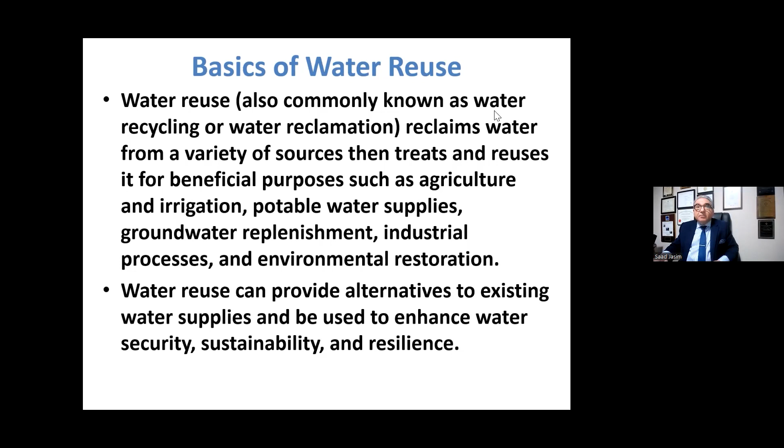Okay. There are, in general, two kinds of water reuse from a planning point of view: planned or unplanned. Unplanned means the source water is basically composed of previously used water. A common example of unplanned water reuse occurs when communities draw their water supplies from rivers which receive treated wastewater discharge from different communities. Many cities have water discharge and water intake not far away from each other, and that's where you see the challenges.

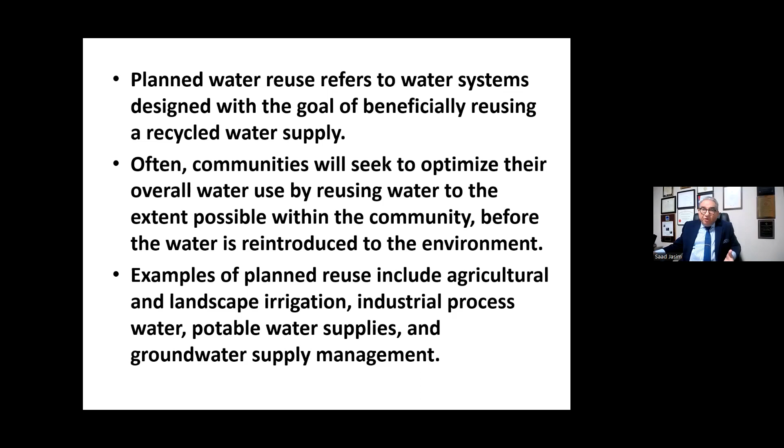Planned water reuse refers to water systems designed with the goal of beneficially reusing a recycled water supply. Communities want to optimize water reuse to provide more safety for the environment, and also use this water source for irrigation, which is the major use of water in most countries now, especially the MENA group, which is Middle East and North Africa. So that gives more options of new water sources.

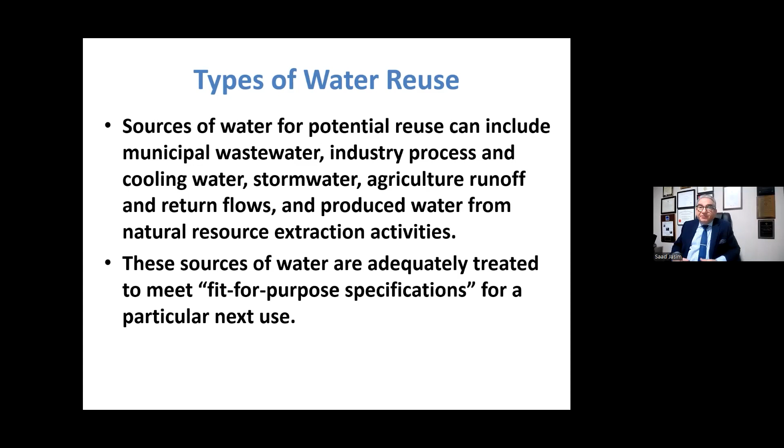So for types of water reuse, there are many sources of water that can be reused, such as industrial process water like cooling water, stormwater, agricultural runoff, and return flows. These are different sources that could be used. And these sources usually need to be treated to what we call fit-for-purpose specifications. That means each one of them is site specific.

So fit-for-purpose specification is: you develop treatment requirements to bring the water from its existing source level to the water quality needed for the new application. So when you want to do it for agriculture, it's different from when you do it for industrial.

So you have to develop it, and the main thing to keep in mind is the health of the people working. So if you put reused water that has some pathogens, that means the farm workers could be in jeopardy and could have human health problems.

So some of the examples of water reuse: irrigation for agriculture, irrigation for landscaping, such as parks, rights of ways, golf courses. And golf courses now are known to be one of the biggest consumers of fresh water, because they try to keep it green all the time, because you have those members who want to come and play golf regularly. So they almost water it every day, if not more, if it's warm weather.

Municipal water supply, process water for power plants, refineries, mills, and factories. And one of the issues is that sometimes the fresh source water could be a problem. I'll give you an example: the Monroe nuclear facility. Back in the late 80s, early 90s, it almost shut down because the intake got accumulated with zebra mussels. They blocked the water supply. So those are some of the problems you have.

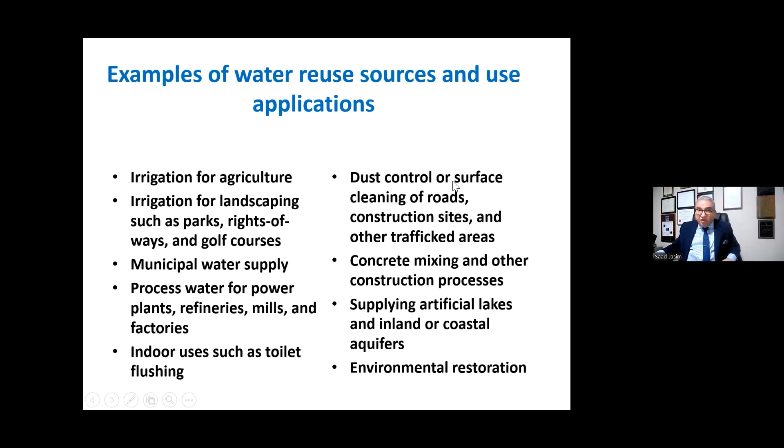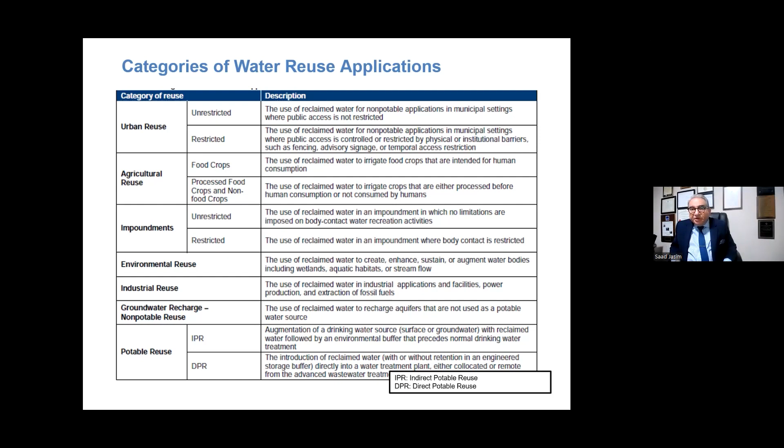Groundwater recharge is one of the key things they are looking at in locations like California and Arizona because of the water shortages. They used to depend on one of the major rivers in that area, the Colorado River, and that river has come down to a very low level in the last few years. So the recharge of groundwater is important because groundwater is usually used heavily by agriculture, because it's cheaper than paying for fresh water. So this is a good list of these kinds of things, whether it's indirect potable reuse or direct potable reuse.

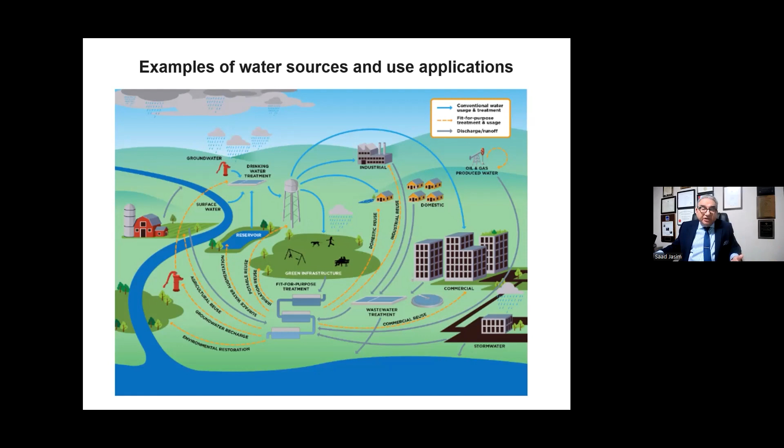Also, people find that even in agriculture, you get water that has chlorine residue in it, and this is not the best. In many other countries, like where I came from in Iraq, back in the 60s, we used to have at home a separate raw water line for the garden. So that reduced the impact of chlorine and also reduced the pressure on the water treatment plant, because otherwise you're going to be producing almost twice the amount in order to satisfy the demand.

So in Canada, for example, there are certain applications, not widely used, I have to say. Canada is only 37 million people, and we have in Canada more than 20% of the world's freshwater. The Great Lakes is 20% of the freshwater of the world, plus many other rivers and tributaries. So that's why there are some applications, for example, reuse for toilet and urinal flushing. Some applications for agriculture, not widely used, but it is.

I'm one of the people who've been pushing for that, because not many people, unfortunately, even academia, like universities, are interested in getting into projects like that. And everybody goes after... Science is becoming like politics. Whenever a new contaminant comes, everybody runs after that. Like now the PFAS. I remember 20 years ago it was the pharmaceuticals.

And one of the media reporters contacted me and he said, has the pharmaceutical issue been resolved? I said, no, far away from that. And he said, so why does nobody talk about it? I said, because they now have a new item to talk about. And the problem is most of the time the politicians talk about it and people follow that, especially if you want to get a grant, you need to have some political support to get that, unfortunately.

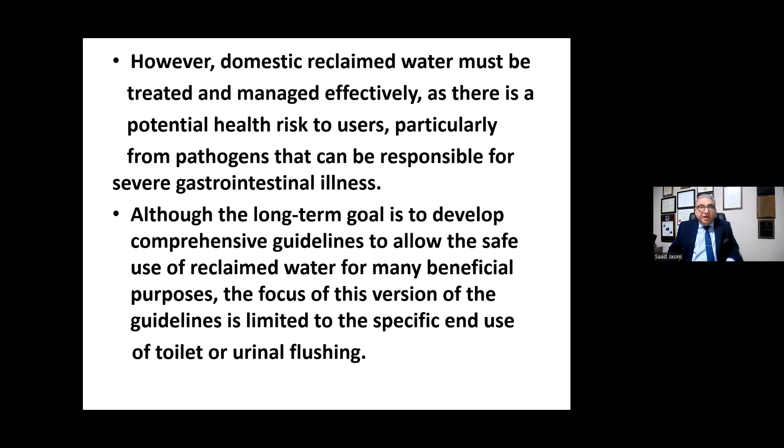So a big issue to consider when you have water reuse is the health risk, especially pathogens, because if they have pathogens that could come directly or indirectly to the person, they could cause a severe gastrointestinal illness. So when you develop a comprehensive guideline, you have to keep in mind that a major issue is the impact on human health, directly or indirectly. And that is why the guidelines need to be developed.

So basically, when you have these kinds of guidelines, you know that you are protecting the public health. Any guideline will include values for water quality parameters, selected to demonstrate how effective the treatment used is. So basically, they put a table for you, what treatment needs to be used, and what is the guideline, what is the minimum, what's the maximum. Pathogens, you should not have any, especially parasites or bacteria, even total coliform, because it will become a problem if you keep feeding it.

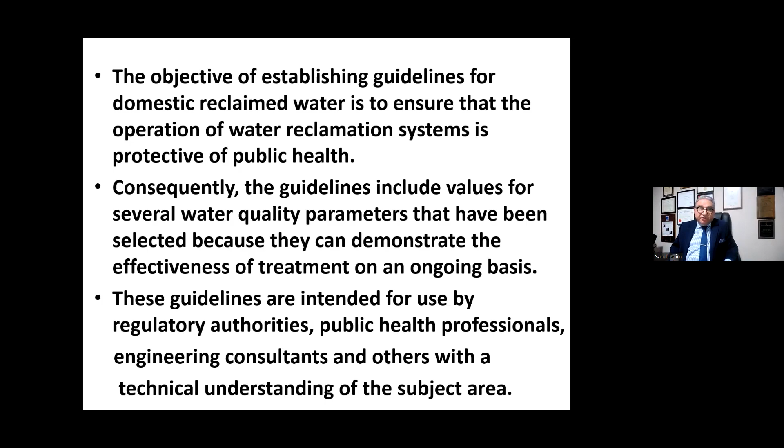And the people who are involved in that need to discuss it with engineering consultants and people who have knowledge in that area. And there are some situations, for example, when they use water to flush toilets and urinals, that could make a significant contribution to reducing water use.

And one example, when I went to Walkerton, after the tragedy when 7 people died and half of the town were sick in hospital, we developed the Walkerton Clean Water Centre, and we built a LEED Gold building, and we did water reuse, because as a training center you could have more than 100 people present, and you have big washrooms. So we use the water from the labs, and that gets disinfected again and used to flush the urinals and the toilets. That would help. That means you control that there is no bacteria or protozoa.

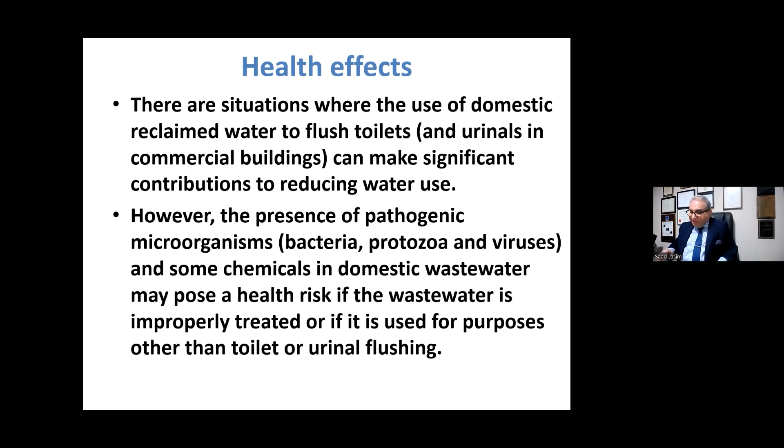If you're going to use domestic treated sewage effluent, that could have some of these kinds of challenges. That's why you need to have certain disinfection processes that you know are not going to compromise the removal of these compounds, because if by mistake it comes on your hand and you put your hand on your mouth or your face, if you have any E. coli or protozoa in that, it could cause a problem. And sometimes the cross connection, if there is any leak, could be a problem as well, and it could cause many people to be sick.

So this is of particular concern for individuals, especially infants or elderly people, because in infants their system is not highly developed, and also the body weight is small, so there could be a problem. And elderly people might have dialysis, and it could cause kidney damage. And in fact, in Walkerton, that strain of E. coli caused kidney damage, and the 7 people who died, died because of kidney failure.

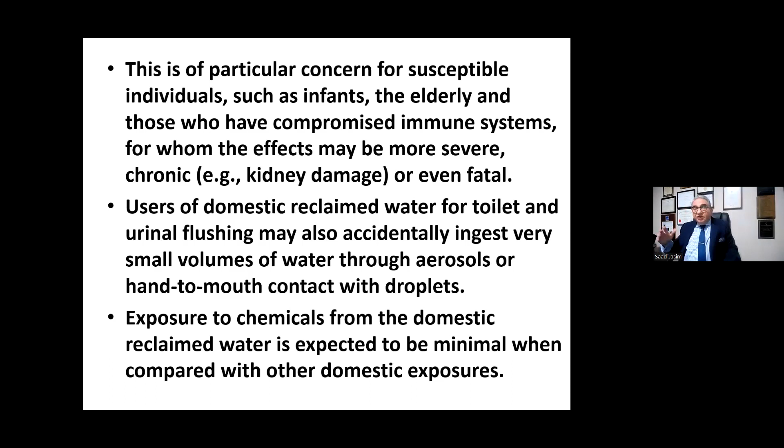So that is why you need to have a very stringent disinfection process in order to maintain the safety of the people. The exposure to chemicals I would consider maybe the second one, but that always has a long-term impact on people. So that's why you need to make sure that this does not have an issue like that.

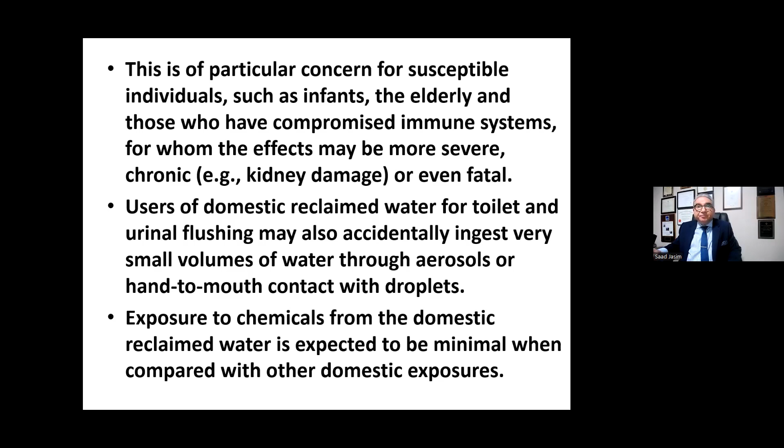So you need to do some kind of management when you do water reclamation or water reuse. That means when you do collection and treatment from a single domestic dwelling, for example, for clusters or apartment buildings. And there is always a potential impact on people, even with small systems. Sometimes a small system could have more complex problems similar to large systems.

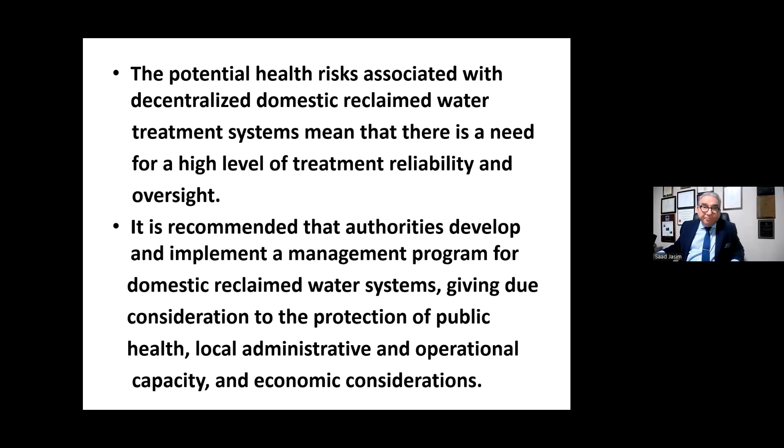So the potential of some kind of contamination with reclaimed water means that there's a need to have a high level of treatment reliability and oversight. And that's why when you design a water system, you don't design to what the guideline needs, because the guideline is the minimum. You always design with a safety factor, because you could have a major storm, you could have a problem, and that's why you have boil water advisories happening, because the system is not reliable or robust enough to deal with that.

So you need to develop a site-specific risk assessment. You have to have people with the knowledge to come and evaluate the potential microbial presence in the source, and what kind of reduction or inactivation is achieved by the current treatment. And with treatment technologies, you have to compare the treatment capability with the existing risks. So when you have cryptosporidium, which is one of the tough parasites because it has a shield, chlorine cannot impact these parasites, whatever the concentration is.

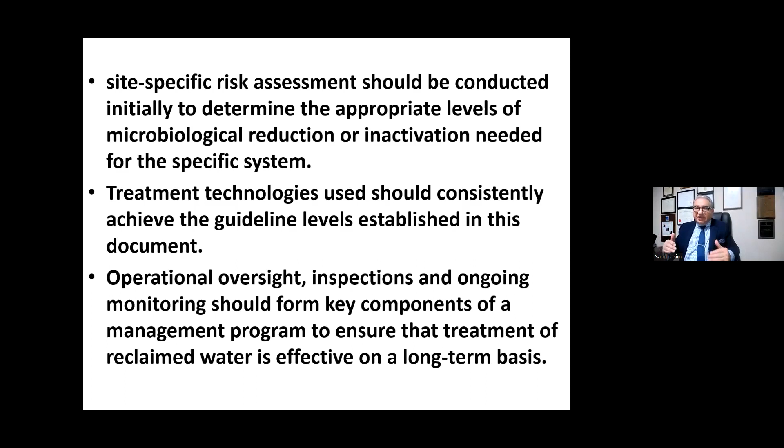And that's typically what happened in Milwaukee when 100 people died in 1993. So you need to develop systems that are capable of dealing with potential problems. You don't develop a system based on the good existing situation. That's why when I tell people when to sample, you sample when there's a heavy rain or a storm, because that's a worst case scenario, and you have your system designed to take care of that.

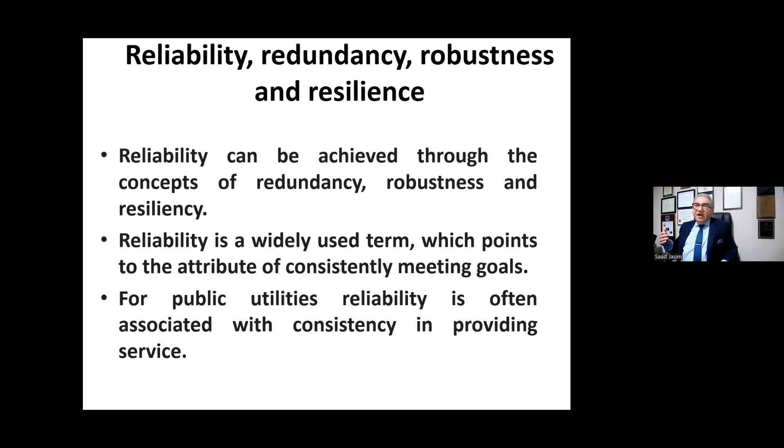So you need to have reliability and resilience. You hear this word quite a bit these days, but it depends on a few specific topics like redundancy, robustness, and resiliency. And I'll be talking about this now. Reliability, as I said, is used a lot by scientists, by politicians, by regulators. Reliability is often associated with providing a consistent quality and quantity of water for the water business.

So for a potable reuse system, reliability would describe the ability of the system to provide water to the public without compromising public health, and reduce the use of the drinking water supply. Redundancy, robustness, and resiliency describe the measures that could be taken to achieve reliability. So redundancy is the first one, and that is a typical thing when somebody designs a system. You need to have redundancy just in case.

For example, you have a standby pump. If you have one pump to deliver the chemicals, and that pump fails, your system is compromised, and you're not going to be able to do chemical treatment, flocculation, and all that, or even pump the chlorine into the system. So you need to have a backup pump. So by the time you repair that, the other pump is taking its role. And usually that has to be done automatically. When the signal shows this pump is not delivering anything, the other pump will kick in immediately, and that is how the system is designed.

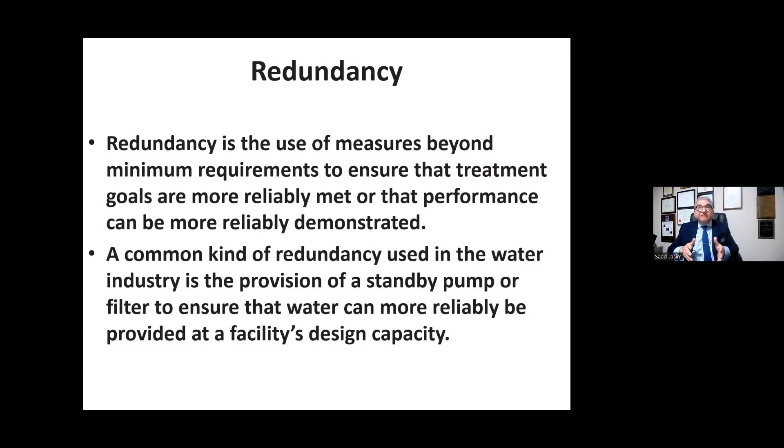But at the same time, you have to be economically right. You don't put 5 backup pumps, because that's a waste. You need to look at how many pumps you need if one pump fails, or 2. The other aspect of reliability is when additional treatment is needed. For example, there's what we call the multi-barrier system, another term used a lot, and we use that for treatment. That means if something fails, the other one will support.

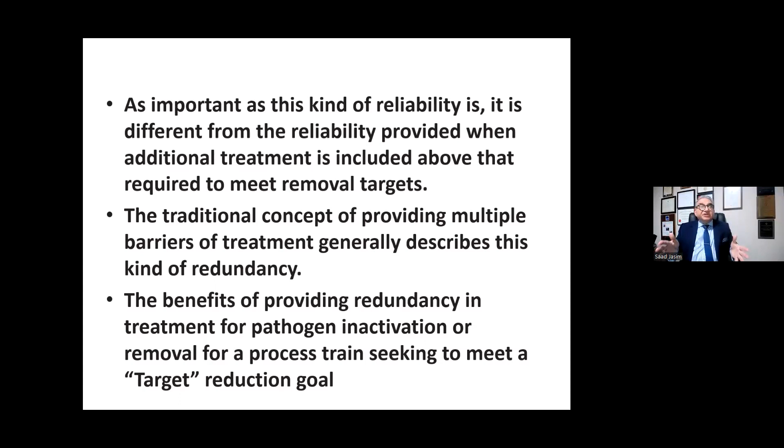For example, in the Walkerton situation, there was a failure of chlorine. There were more contaminants coming, plus the lack of knowledge of the people operating. Then the biggest failure was lying about it; that's why people went to jail. Even that's not enough, because 7 people died, and there is never any compensation for that. So that's why you need to have a multi-barrier system. Robustness means the ability of the system to address certain contaminants.

For example, during a heavy storm, and I'll give you an example, I served in a location where we were downstream about 2 kilometers from the sewage discharge of the city. So in a major storm, the amount of contaminants is overwhelming. So you have to have a system that has a control to push that and deal with that, or to kick in other things for redundancy.

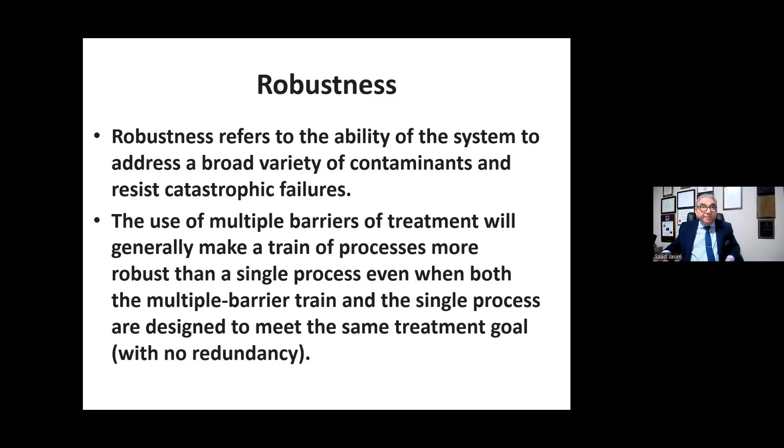For example, if you have one ozone generator and it's not capable, the other one kicks in to achieve the concentrations needed based on the model for the design. So the multi-barrier system here again exhibits great resistance to prevent failures, because you have more than one. It's like a building that stands on four pillars. If one pillar fails, the building might still be standing, but if 2 fail, most of the time it will go down, or 3, because no building will stand on 1 or 2 pillars only.

So that is general talk. I'm not going to get into the civil engineering, but that's just a rough example. So basically, when we say robustness, that robustness is the ability to deal successfully with conditions beyond the actual operation. The resilience is the reliability when the redundancy and robustness are not enough. For example, a combination of monitoring, control, and engineered storage buffer.

So if the operational criteria are not met, for example, we put filter-to-waste on the filters. We have a trigger based on the turbidity coming in. If it's beyond that, the filter goes to waste. It will not go with the general flow that's going to the reservoir. No, that filter will go to waste. So resilience is when you have the ability to deal with that without delivering water that has problems to the consumers.

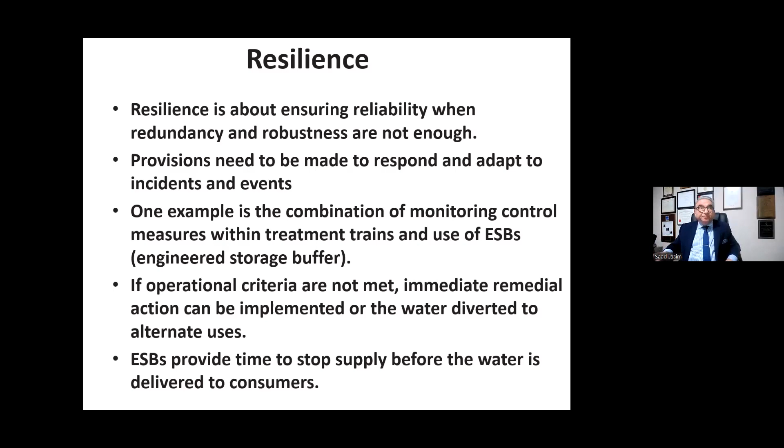So how to validate these things? You have to have some kind of control measures when we use the potable reuse scheme. For example, some communities, like Singapore as I mentioned, do a lot of operations between membrane and disinfection and all that, in order to produce safe drinking water without impacting public health, no different from other sources of drinking water. And the chemical contamination and relatively high concentration of microbiological activity could increase the focus on validating performance.

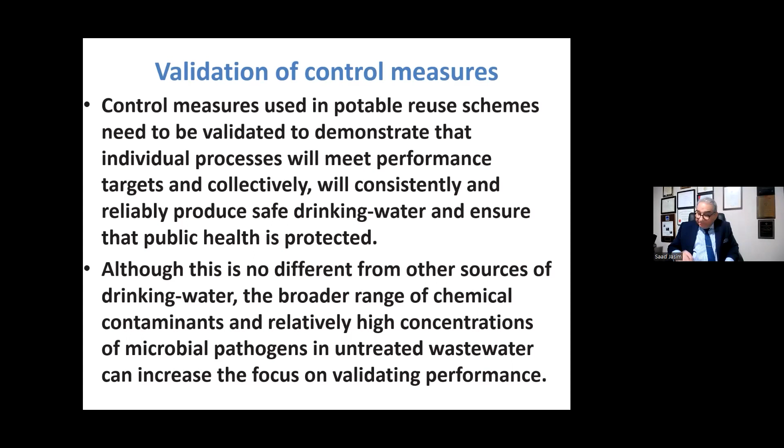So you need to look at how to achieve the performance, whatever the level of hazard reduction, if you have more contaminants compared to the normal resilience of the system. So you have to develop operational criteria beyond the usual controls used regularly. So basically like a backup plan, plan B or plan C, to make sure that you're able to do that for the applications to be supplied.

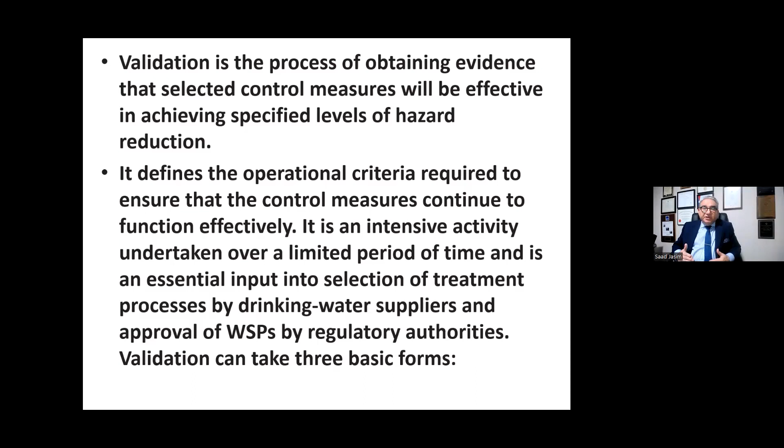So the evaluation of existing data and information is usually published data. Manufacturers provide data on how, when you operate your system, the system can deliver up to that kind of flow, for example, of chemicals. So you have to follow that, and the best way when you are designing is to have some kind of pilot testing. Pilot testing is the closest way to reach a good full-scale design. Bench scale is good, but a pilot system is always better.

And now I'll be talking specifically about the MENA region, the Middle East and North Africa. Historically, a lot of work has been done in these countries, and they developed innovative water solutions to deal with water scarcity. For example, in the Gulf area, the desalination process, and in other locations, building dams, and also drip irrigation. However, we need to look at the challenges and how to optimize water management for that region.

So water scarcity is a big issue, and that's been identified by the United Nations and the World Bank. There's a study released by the World Bank in January 2023 on current management strategies across MENA. There's a conservative estimate of water demand by 2050: an additional 25 billion cubic meters needed a year. That's a big volume.

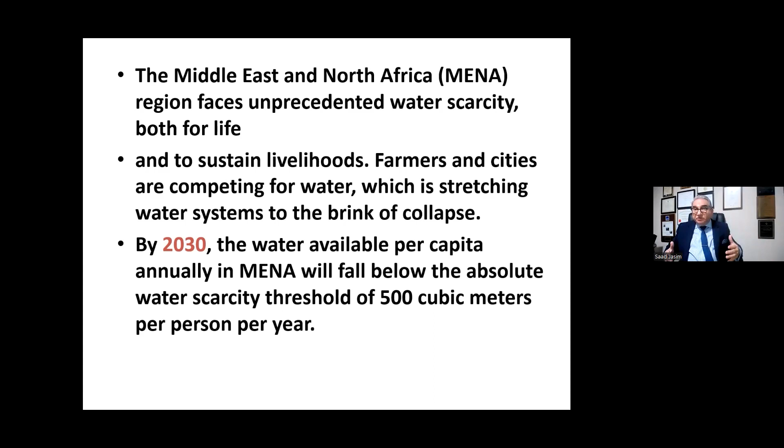Most of the time, in the last few decades, the MENA region focused on the conventional objectives of protecting public health and environment. But water scarcity and urbanization will have another impact because of climate change. That means you need to go beyond the conventional way of looking at that, because reclaimed or reused water is a key solution, because it's a source.

I am a person who used to be in charge of water systems for cities, and when you supply water, the amount for drinking doesn't go beyond 10%. The rest is used for everything else: washing, irrigation, everything else. So you need to look into this issue seriously.

So the MENA countries, which are 10% of the area of the world, receive only 2% of the world's average annual precipitation, and that's significantly low, and contain as little as 0.3% of the global annual renewable water resources. The average annual rainfall in the MENA region is about 250 millimeters. But many large areas are very dry, especially in the Gulf area and further down in the Sahara regions, with not more than 5 millimeters.

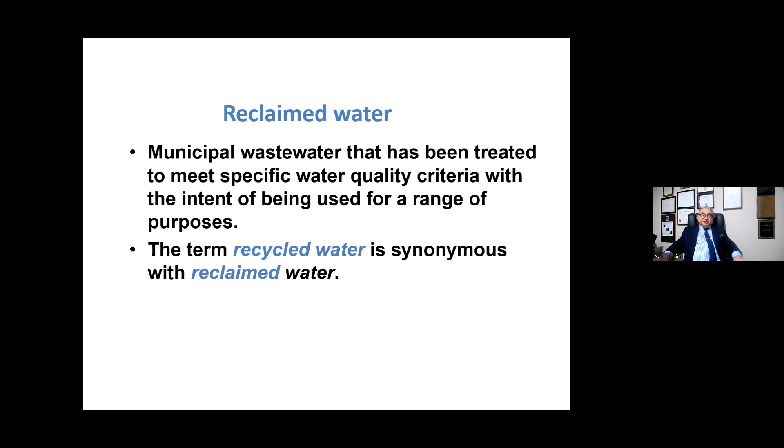So reclaimed water. Again, municipal wastewater that's being treated to meet specific water quality criteria with the intent of being used for a range of purposes. And the term recycled water is synonymous with reclaimed water.

And the problem is sometimes we have some weak baselines for water quality regulations. And again, regulations and guidelines give you the minimum. That's why always in your plan, when you operate, you have to set higher criteria. Because whenever any problem happens, you could go below the guideline level, that is a violation, and that could impact public health as well.

So climate change is now causing more of these issues. Food security is a big problem. And in the Middle East and North Africa, Algeria, Egypt, and Morocco are among the top 10 countries importing grains, although they are among the main grain producers. Net cost of food commodities imported by Arab states increased from $10 billion in 1980 to $28 billion after that. So the increase is significant here.

Climate change is something many people used to deny about 10 years ago, but people are realizing this is significant, and treated water reuse could be an answer. And the issue here is not just the science. We need to keep talking about the social aspects in the media, because it's public acceptance of water reuse. And in this region, we don't talk as much about potable reuse, but at least for other uses.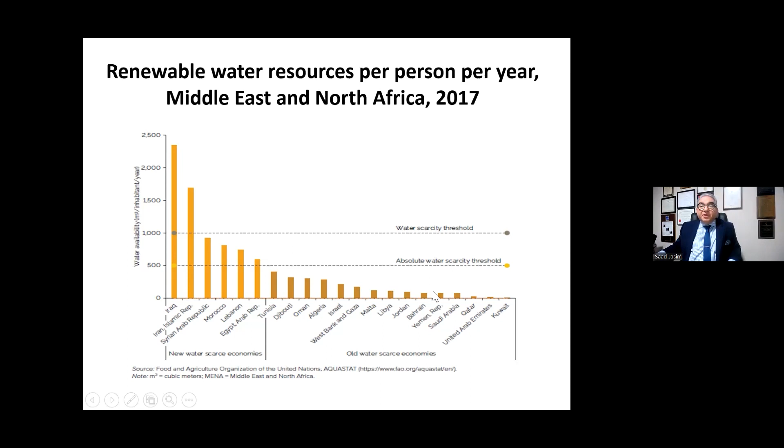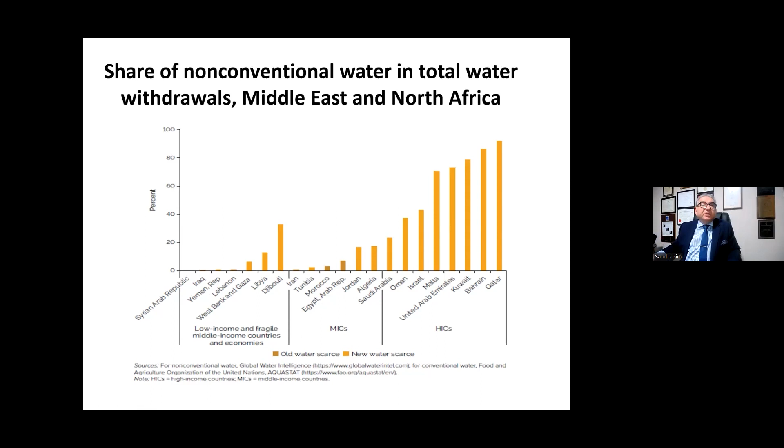And here the non-conventional water, and you see Qatar, and Qatar has a small population as well, but the impact they're doing is useful for some of these approaches. And these are the high income countries, and you see a better situation here than middle income countries, and here low income fragile economies. And that is the most updated report from the World Bank about the expectations. They have economists and people who collect data on-site to come up with these details.

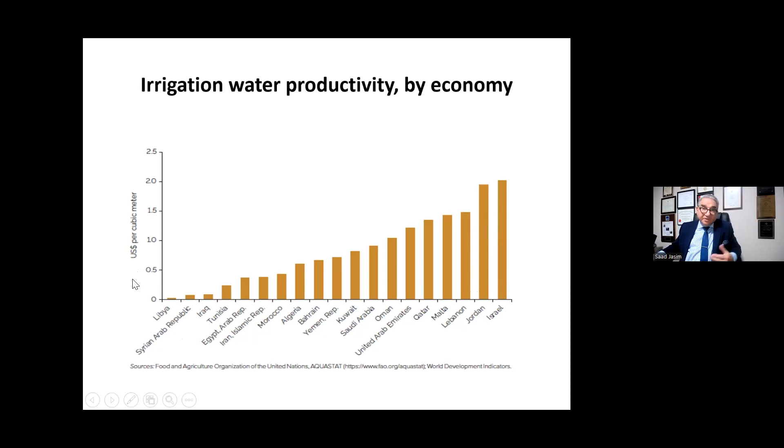The Food and Agriculture Organization of the United Nations developed a study as well about irrigation water productivity. Israel and Jordan are close to each other, and again Libya is one of the lowest in the area, followed by Syria and Iraq. That is because of the political issues, the wars, the fighting. So you lose a lot of the value of the system. Some of the systems are not working anymore because of that. So we talked quite a bit about this.

So mainly agriculture water use is the highest, and it is predicted that agricultural productivity in the region will drop by 25% by the year 2080 due to climate change and water scarcity. And that is alarming. That means you will have more dependence on other countries to supply you water, bottled water and others.

And Qatar, for example, has reported that production of treated effluent increased from 24 million cubic meters in 2004 to 117 million cubic meters in 2012. That's because of the construction, the work population, all that. And that could change, especially since the World Cup is finished and most of the construction is done. So there will be some reduction in use. But at the same time, there could be more projects, and it is expected that about 67% of the TSE goes to agriculture, mainly irrigation.

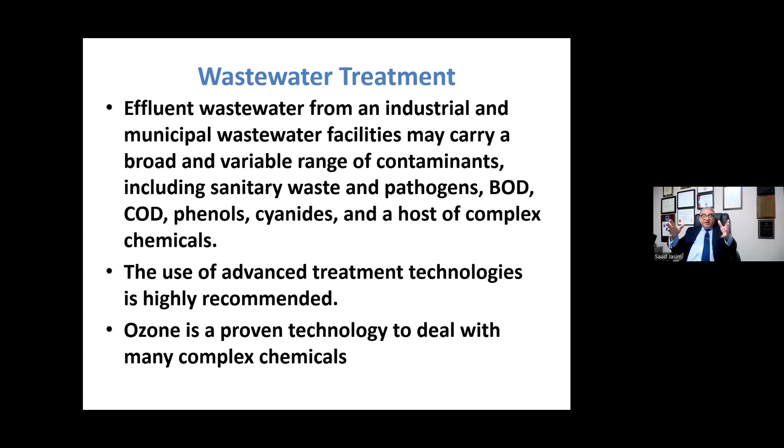Ozone is a proven technology for oxidizing and reacting with many complex chemicals. Ozone, if some people don't know, can be produced in the air. When you have lightning, an electron breaks the oxygen molecule, which has two atoms, into those atoms. So this will be broken into two. One of these atoms attaches itself to an oxygen molecule and becomes ozone, O3, three atoms of oxygen. But it is a reversible reaction.

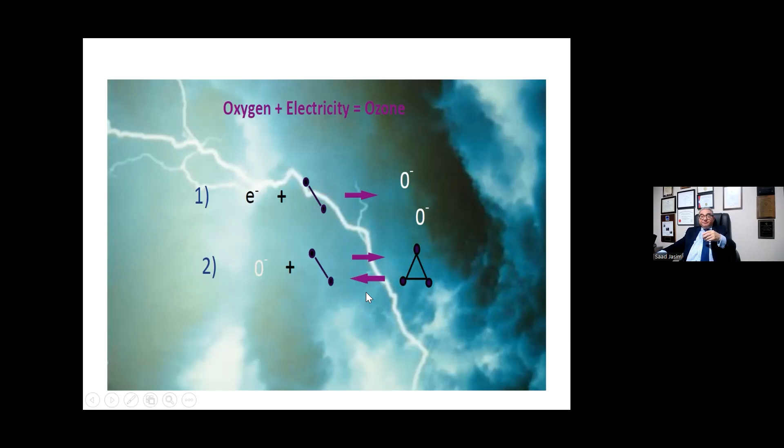That means ozone is not stable, and that's what makes it very reactive. If a gas or chemical is stable, it's not as reactive. But if it's unstable, that means it's very reactive. And this is what we just said, how it works when you have an electric discharge, like what happens with the electron. You break it into two atoms, one attaches itself, so it becomes O3.

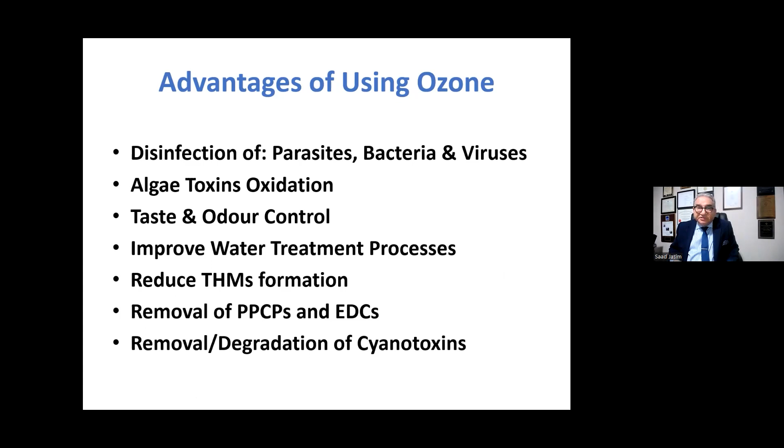Advantage of using ozone: disinfection for parasites, bacteria, and viruses; the algal toxins; oxidation; taste and odor control; improving water treatment processes; reducing trihalomethanes, which is a carcinogen from chlorine application; removal of PPCPs; and cyanotoxin degradation.

So the study was done by the Water Research Foundation in the United States at 10 degrees C and pH 7. They found you need 1.43 CT for ozone. Chlorine is 112. Chloramine, which is chlorine and ammonia, 1,850. What does that mean? For example, if you have 1 milligram per liter of ozone, that means you can inactivate this Giardia in 1.43 minutes. But if you have 1 milligram per liter of chlorine, you need 112 minutes. And if you have chloramine, 1,850 minutes.

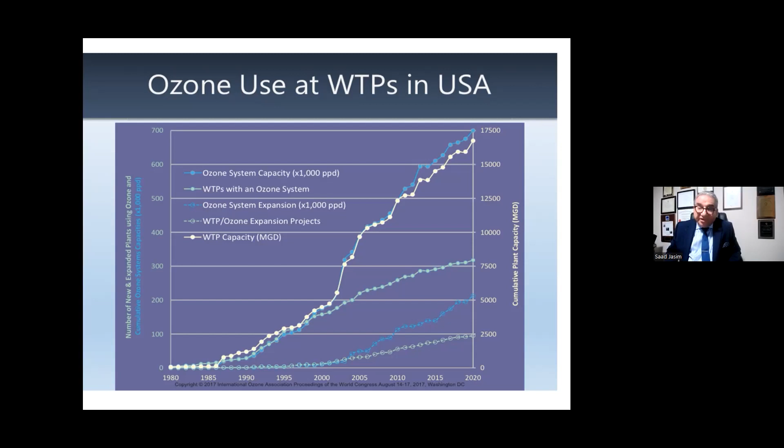And if you go now to Europe, most of Europe is using ozone. France, Britain, Germany, Switzerland, and many others. Switzerland is the most strict on the issue of contaminants, and they are using a lot of ozone and ozone-based advanced oxidation. Japan is also one of the leaders in the application of ozone for water and wastewater treatment.

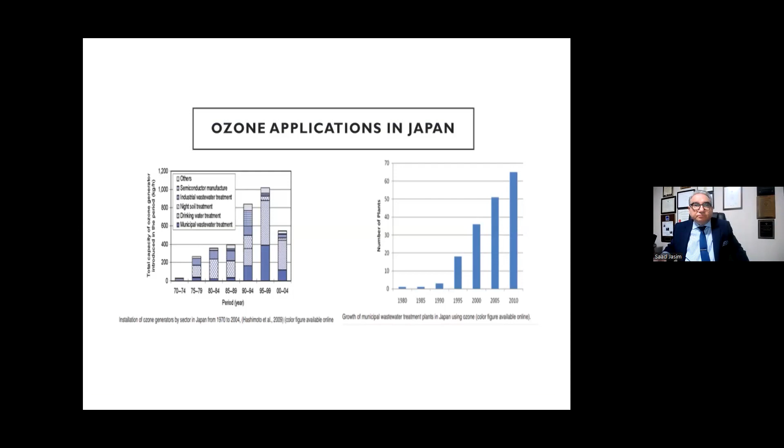So ozone is a powerful oxidant and reacts with the PPCPs, the pharmaceuticals and personal care products, and EDCs, the endocrine disruptors in water systems. These compounds could cause cancers. And also we've seen, as I presented in previous presentations, that they have an impact on some of the species in the water, like fish.

Some of the studies show that it impacts the fish, and the male fish start to produce female organs as well. And the shape of the head of the male fish looks like the female fish. And they call that the feminization of fish. So that's a very well-known topic in the industry; the work on that has been going for more than 10 years.

So you need to look at what kind of parameters you want to reduce, what kind of organics are in the water. We worked on a study in the city of Windsor, and we did an evaluation of some antibiotics, because the World Health Organization did a report collecting data from 114 countries, and they found that the biggest issue in the next few decades is the antibiotic resistant era. And we've seen outbreaks in hospitals and other locations. Somebody goes there with, for example, breathing problems, and leaves with a skin rash from MRSA or others.

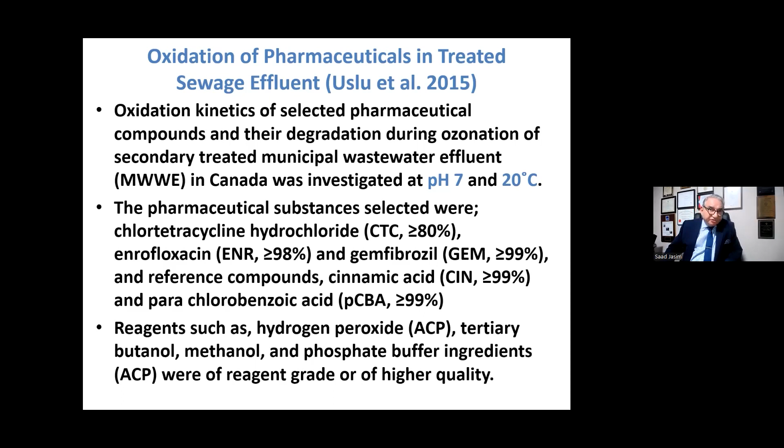And in the study, they looked into certain reference compounds. And we don't have to worry about that, because this is pure chemistry for the HPLC work in order to get these reagents and all that. So basically, when we looked at these compounds, we found that some of these reagents could provide higher grade quality.

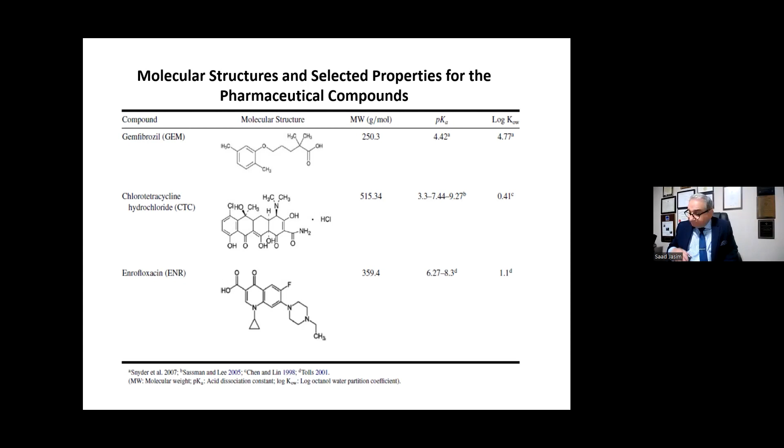So you see, that's why when you're going to design a plant and you want oxidation for that, you have to keep in mind you deal with the worst case scenario, which is the gemfibrozil here, in order to get the reaction. And this is because of the chemical structure of this compound. So the degradation of the pharmaceutical substances was higher for the CTC than the ENR, and the gemfibrozil was the lowest.

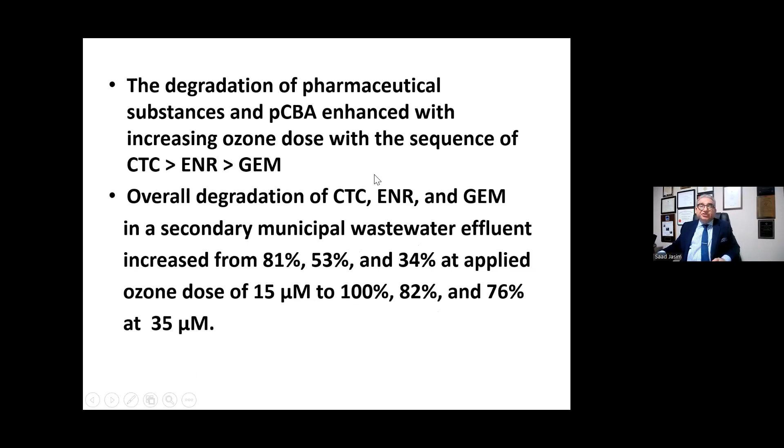So overall degradation increased from 81 to 100% when we increased the ozone dose. So ozone dose was key. It increased here for the CTC from 81% to 100% when we increased it to 35 micromolar. And the other ones from 53 to 82 and 34 to 76. So a major reduction.

So ozone oxidation: other studies were done by Shane Snyder, who's now at the Nanyang Technological University in Singapore. At that time he was in Nevada, working with the municipality. He looked at ozone and ozone-based advanced oxidation, which is ozone plus hydrogen peroxide. Ozone is a little bit selective in the reaction, but when you add hydrogen peroxide, the hydroxyl radicals make oxidation more unselective. So it goes after all of it.

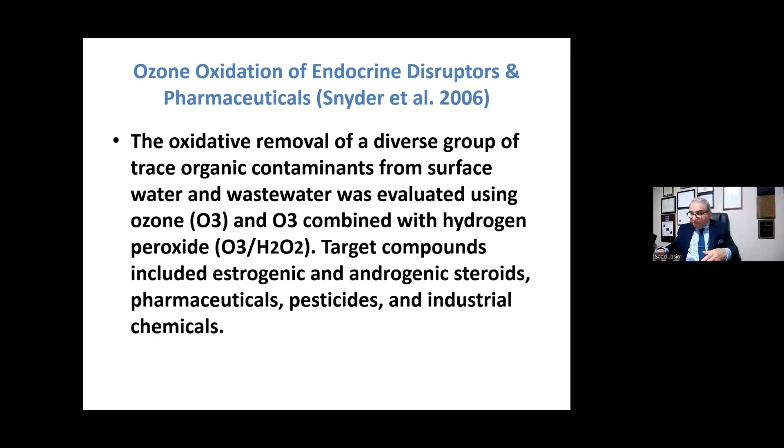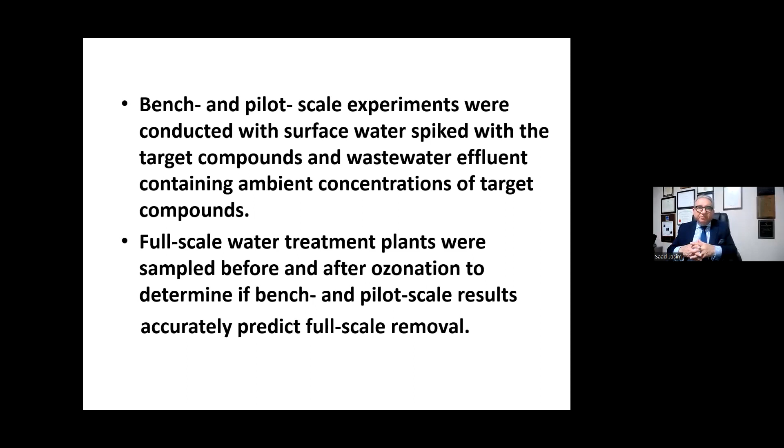So we did a project in Qatar during the time I was working there, in 2015-16. We wanted to investigate how useful the treated sewage effluent water would be. As we said, the population is increasing, the demand is increasing, and more treated sewage effluent is coming out. And they have lagoons there, and they use it afterwards for irrigation.

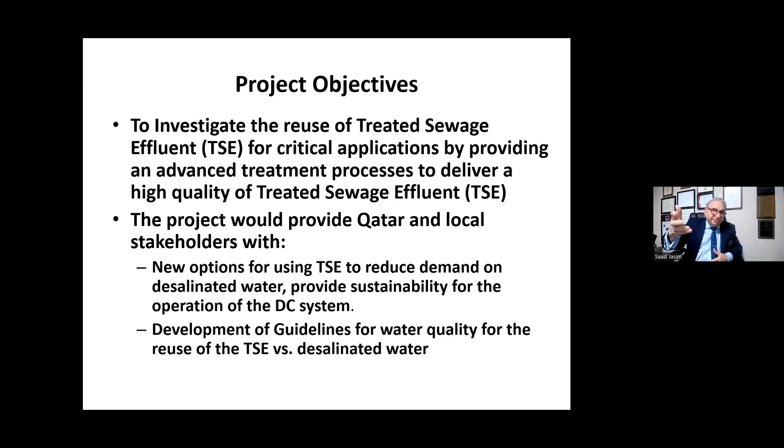So the discharge from sewage treatment plants, as we said, has increased, and there is a lot of evaporation from that. So what's left will be higher in concentration, and that becomes a problem when we do the retreatment. And the sewage treatment plant is a giant collector of human pathogens and other activities.

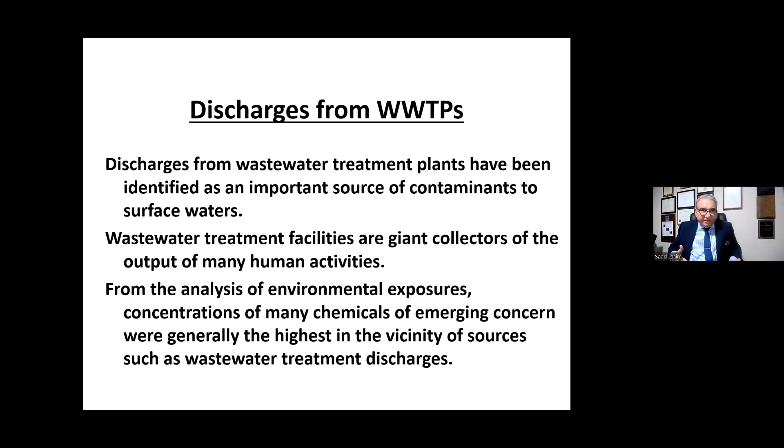So what are the challenges for treated sewage effluent? Seasonal changes, presence of certain organics and chemicals that might have an impact on operation and equipment, pathogens, chemicals of emerging concern, pharmaceuticals, and endocrine disrupting compounds. The PFAS, which is what we hear about now, coming from non-stick surfaces, or even from use as fire retardants in clothing and others. These are some things, and also odor and color.

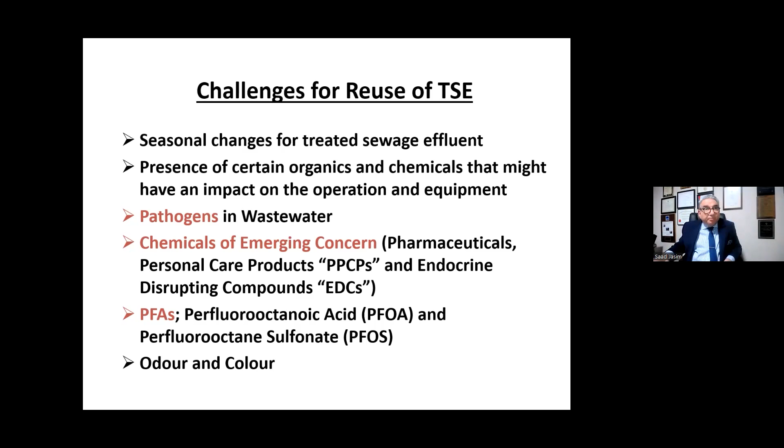So why do we have to be concerned? The reason is, especially for the pharmaceuticals and other chemicals of emerging concern, these compounds were developed not to biodegrade quickly, especially pharmaceuticals, because they need to stay in the body in order to have an effect, for example, if you have sickness or something like that. So for human health, sometimes people don't understand how significant this issue is.

I remember one time one person argued that the concentration of nanograms per liter is nothing. I said, yeah, but you're looking at using it every day. You have that kind of complex addition of these compounds. You have hormones, you have all kinds of medications for high blood pressure, cholesterol, others. So together, it is a problem.

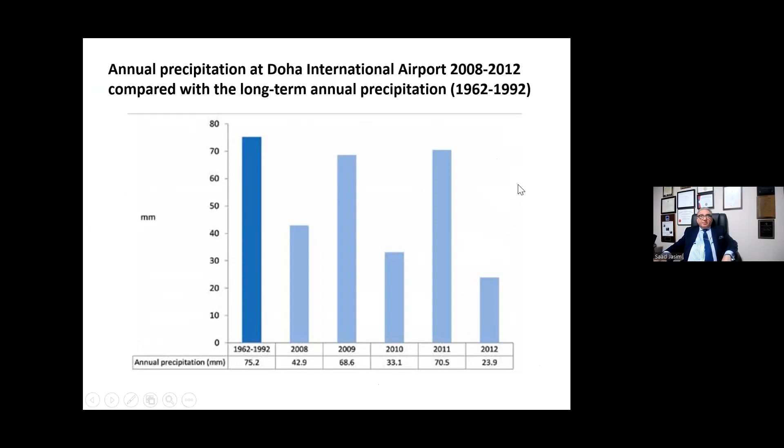As we indicated earlier, the water consumption has been increasing with more population, according to the figures we had at that time, close to 1.5 million workers, including us, who came to the country to work. The major amount of water is being used for agriculture, estimated as 271 million cubic meters. And private households were the highest, 295, because here you also have swimming pools, and that's a big amount of water and a lot of evaporation.

And government use, the applications they use for their buildings, laboratories and others. So these figures show agriculture is always the biggest issue to focus on in order to reduce the demand on the freshwater supply. Here again, it gives you how much is for treated sewage effluent, seawater desalination, public supply, and groundwater abstraction. And you see at a certain time agriculture is the highest application.

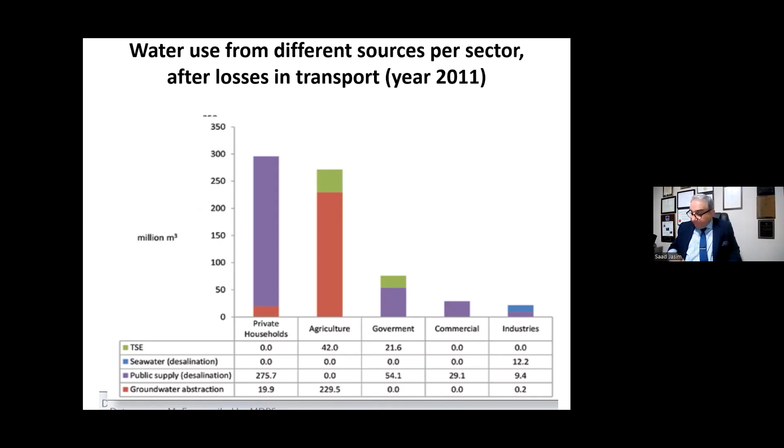So we developed a design for a pilot plant using different technologies, because there is no one technology that can deal with all these issues. And we submitted a patent on that plant, which was built with a SCADA, meaning automated data collection. You can run the system 24 hours and collect the data, and some of the analysis needs to be done in-house. The main focus was on the removal of pharmaceuticals and other compounds that come in the municipal water.

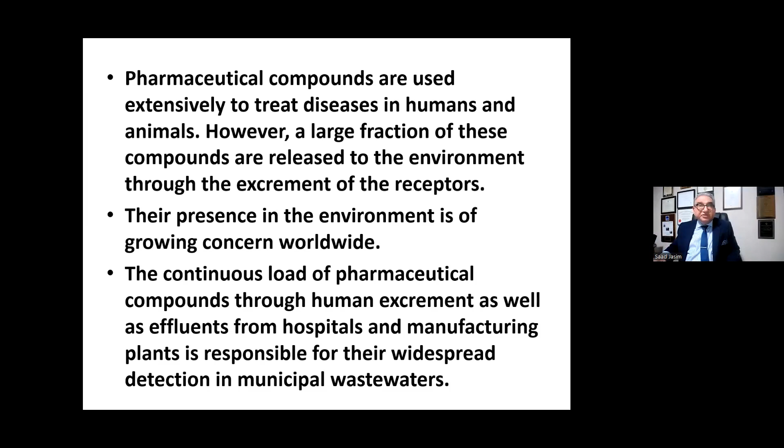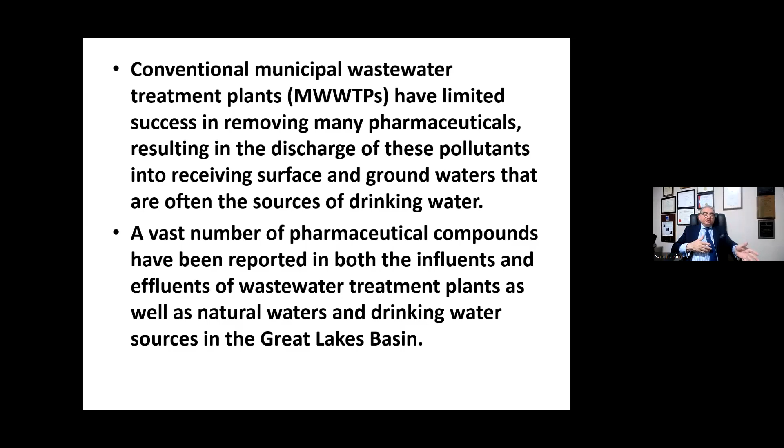The regular water treatment systems, the wastewater plants, are known to be unable to remove these compounds, and that's the significance of this kind of application, how much you're reducing the contaminants coming out and getting consumed by the public. We did a study, as I indicated, on the Great Lakes, to make people think about it seriously here between Canada and the United States.

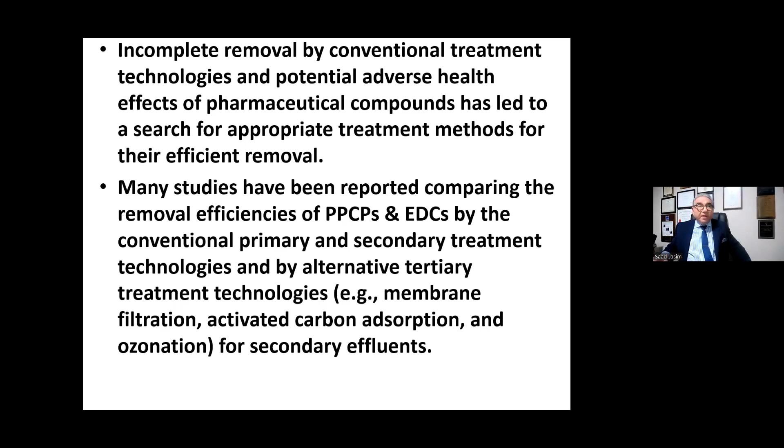1,448 sewage treatment plants discharge into the Great Lakes. And you have populations, for example, Chicago, I think 8 million something. Detroit used to be close to 2 million. You have Milwaukee and the state of Wisconsin. So there are eight states around the Great Lakes. That means there is a big issue of these compounds going in, and most of these treatment plants have no ability to remove them. So treatment technology could play a big role.

So ozone oxidation plays a big role. The oxidation ability of ozone, compared to chlorine and others, is way higher, in addition to its ability to inactivate pathogens like Giardia or Cryptosporidium or viruses. So it's able to remove these compounds. When you have a system like ozone, the pathogen is not a problem. The biggest issue is the other chemicals that we are dealing with.

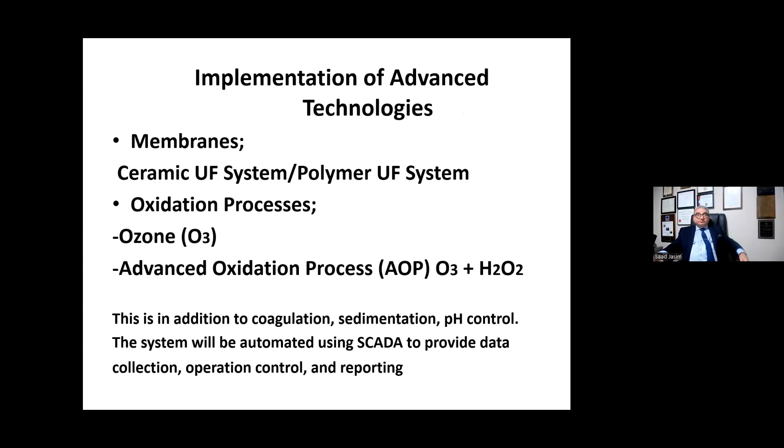So this system includes the pilot plant. We use membrane, ceramic or polymer UF. We ended up using just the polymer UF because the ceramic was not available at that time. And for the oxidation process, you could use ozone by itself at multiple stages, or ozone and advanced oxidation, ozone and hydrogen peroxide. This is the schematic for the system.

So we developed this just in case you can't get the sewage water, because you have to have certain permits to bring it into a building. So you can develop your own sewage discharge if you don't want to include human waste or something like that, and it's easier. You just add chemicals or organics to mimic the waste.

Also, pH, you can control it using CO2, carbon dioxide, and you could measure it that way. And we looked at the use of certain applications like flocculation and sedimentation. This was much lower in cost for operation compared to reverse osmosis. That's what many people are going to say.

But the thing is, when you do reverse osmosis, you have to add some of the other chemicals that you need. It depends what you're going to use this treated sewage effluent for. And you don't want to use water that has nothing left in it as well. So what we did here is significant. It could take more space, but reverse osmosis systems are not small in size for a big volume like this. However, this would not need more manpower to operate and monitor, because everything was done automatically. Chemicals are added based on the concentrations required.

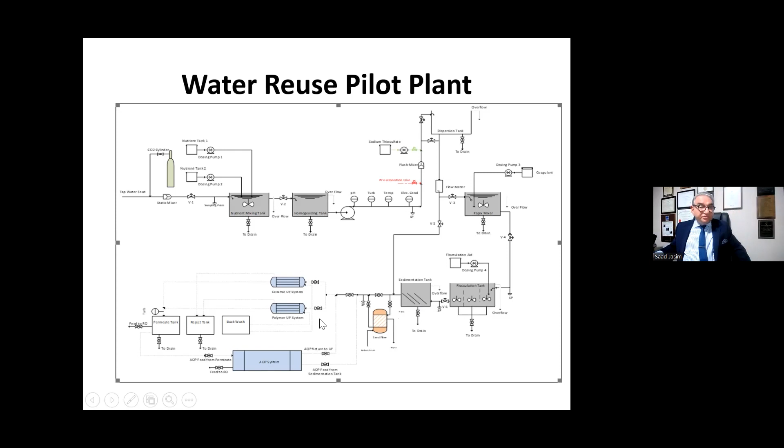Sedimentation, usually plate settlers, and the solid discharge goes out. Then water goes into this filter, which could become a biologically active filter. You could use sand. That could take longer to produce the biological activity, but if you use granular activated carbon, the development of biological activity is faster. And here you have the two membrane systems we use for that. And this is the system.

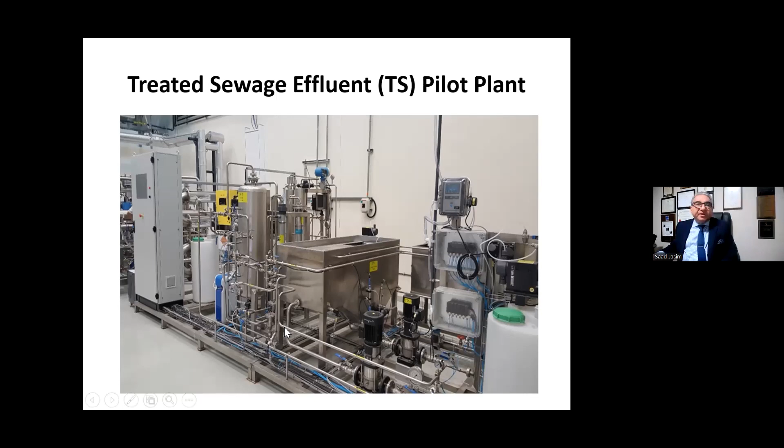You see a view of these tanks, and everything was designed from stainless steel. That's another section from the system. And we developed the ozone contactor in plexiglass. We tried to get glass, but the manufacturer said any pressure could break it. So we used this plexiglass, a certain type that does not get impacted by ozone application. So that was built and started to be used. My understanding is they are doing some tests on it right now in one of the sewage treatment plants.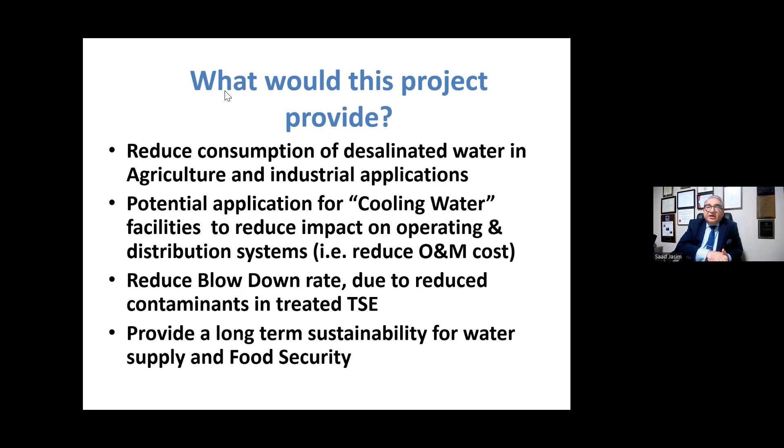And so if you have a good quality of treated effluent, you have less demand on the desalinated water, because you could be watering your gardens, washing your driveway, because everything is supposed to be clean and does not cause any potential health issues. So that is what the project would provide: knowledge of how to operate a system, how to reduce the use of fresh water, and maintain a good health system.

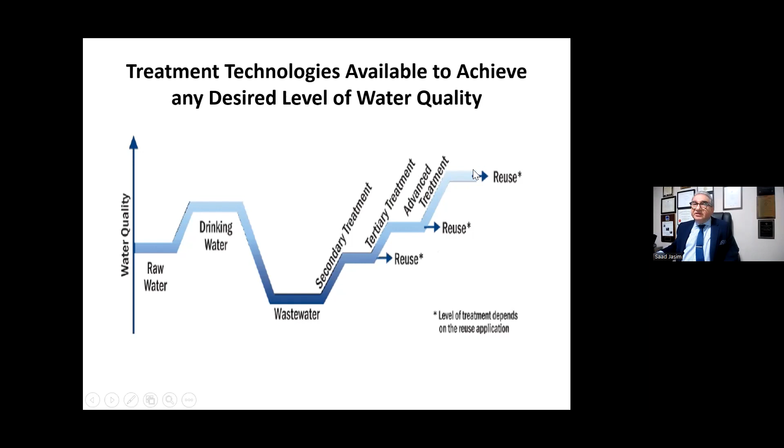And here it shows what you achieve. Here you have raw water, you have developed drinking water, then some becomes wastewater. So you do secondary treatment, tertiary treatment, and then advanced treatment, with part of it being water reuse. And then at the end it is water reuse.

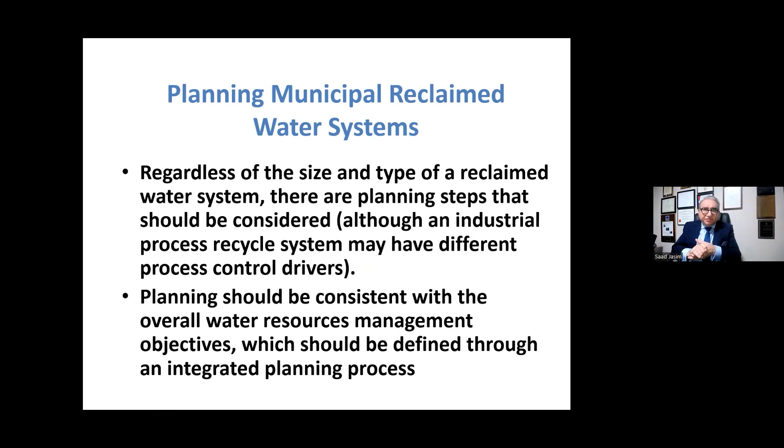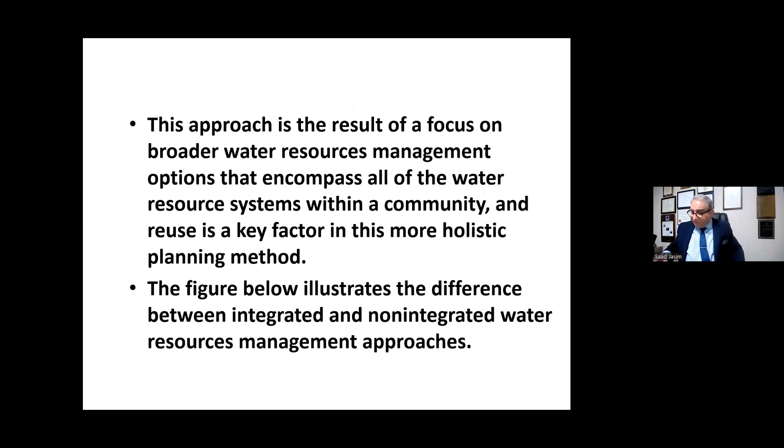So you need to develop certain planning for municipal water systems, based on your system: what is the source of the water, what is the volume required, what is the demand. The US EPA developed a certain process and program, basically a plan for how you would deal with the challenges facing your water system. So you would be focusing on broader water resources management options that consider all water resources within the community, and a holistic planning method. There is a diagram that shows it with the planning and without.

So if you do traditional, non-integrated water resources management, you have the receiving water, like a river, going to the water supply, and the wastewater discharge, the effluent. The water supply could be a well or fresh water, and after you use it, the wastewater goes to the wastewater system, plus storm water when you have rain, and another issue could be combined sewer overflow. But with the management system, you look at beneficial reuse of the storm water coming from the storm sewer.

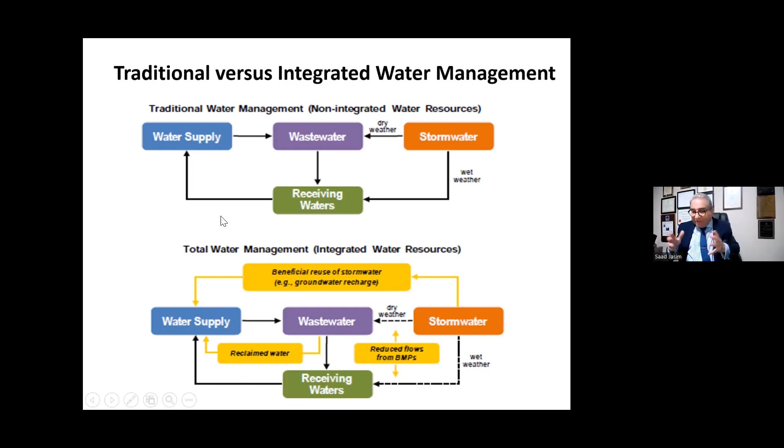Some of it is a dry weather, you're not impacting it, but for the stormwater, there are studies being done in the last 30 years on beneficial reuses. And also, if there's any wastewater reclaimed water, you add it to the water supply. So you see, with that approach, you're looking at how you reduce your demand and how you reuse the water supply in a more efficient, innovative way.

So basically, you're determining some control of the impacts, like environmental impact, climate change, all that. And the integrated management system will improve the opportunities to obtain benefits from water, regardless of what stage of the water cycle it is. So the concepts for integrating water conservation practices to reduce the demand for fresh water are part of the comprehensive management approach.

And you see here, typically used in households, you have rain and it comes down, and there's disinfection, a rainwater storage tank, and there's a filter, and typically putting disinfection here to deal with the water, and some could be reused for the washing machine.

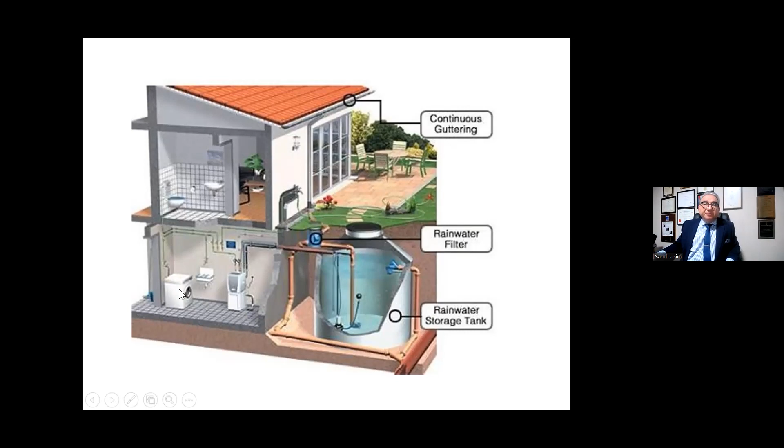So the end result of integrated water management is to reduce discharge to receiving waters and reduce reliance on surface and groundwater supplies. And like in my teaching course, most of the students were international. In fact, almost 99% were international, mainly the group from India. And water scarcity and water contamination is a big issue there. Even when you think it is a nuclear country and all that, still there are issues in the drinking water supply and the drinking water reuse.

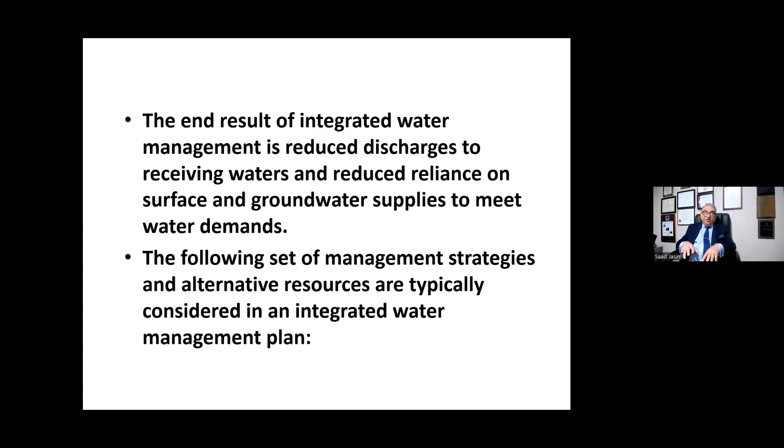So these are some of the management strategies you need to look at. Water conservation, reuse of wastewater, reuse of gray water, stormwater BMPs, best management practices, rainwater harvesting, enhancing groundwater recharge, increasing surface water detention, wet weather urban runoff treatment, dual plumbing for potable and non-potable uses, separate distribution system for fire protection, multiple purpose infrastructure, use of the right water quality for intended use, and green roofs.

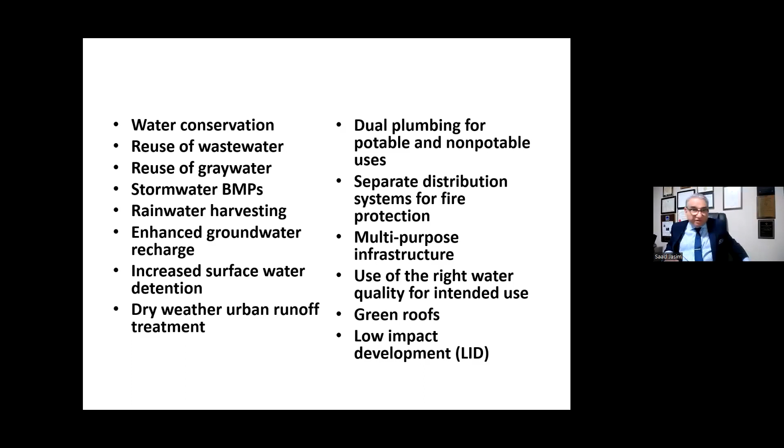And green roofs, basically they put them on certain buildings to reduce the heat that's coming from the sun, and also give some view and reduce water waste that goes down drains. The other one is low impact development. You need to look into that as well. So this integrated approach was applied, in fact, in Los Angeles, California, and that's been a very successful approach, the IRP, the Integrated Resource Plan.

And that approach has been known and used by other cities in order to find out how they can optimize their application. So basically, the goal was to develop multi-purpose benefit strategies to address the chronic droughts and achieve volumetric compliance with water quality. So all these things need to be studied when you do that.

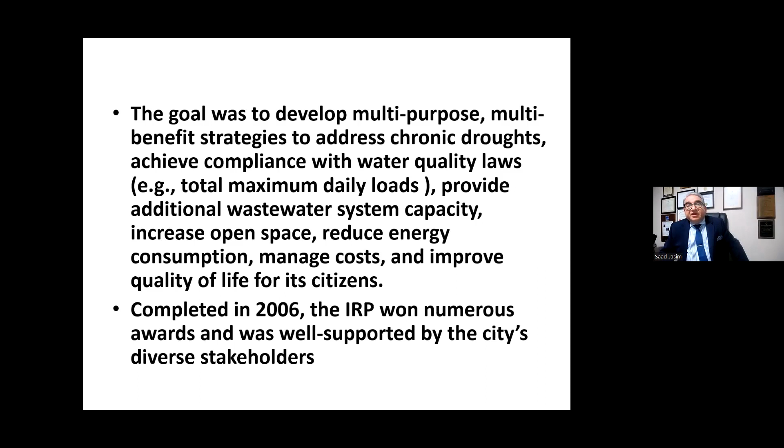And for the study, Professor Majid Mohseni was a partner with me. He was one of the people who worked on the study for a long time. Also, he developed it, and in 2006 the IRP received numerous awards for that approach.

So for project planning, you need to further examine the project viability, identify the quantity of reclaimed water available, screen all existing and potential future uses, identify potential users, and determine if users will accept reclaimed water, because before you invest millions to build a system, you need to have a survey to find out whether people agree with that or not. Compare supply to potential demand, prepare the distribution system layout.

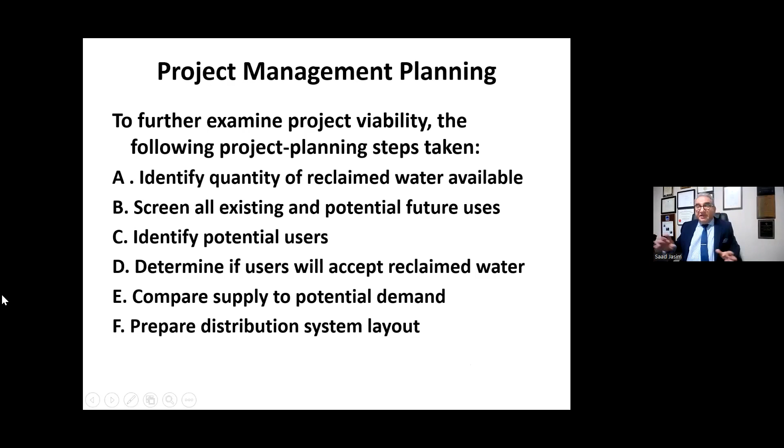When I say whether they accept it or not, they don't accept it because they don't understand it. So that's why the role of the municipality and the government officials is to explain to the public and show them the advantages. And also you need to finalize the customer list, determine economic feasibility, compile the final user list and distribution, prepare point of sale facilities, obtain regulatory approval, perform on-site retrofits, perform cross connection tests, and begin delivering water.

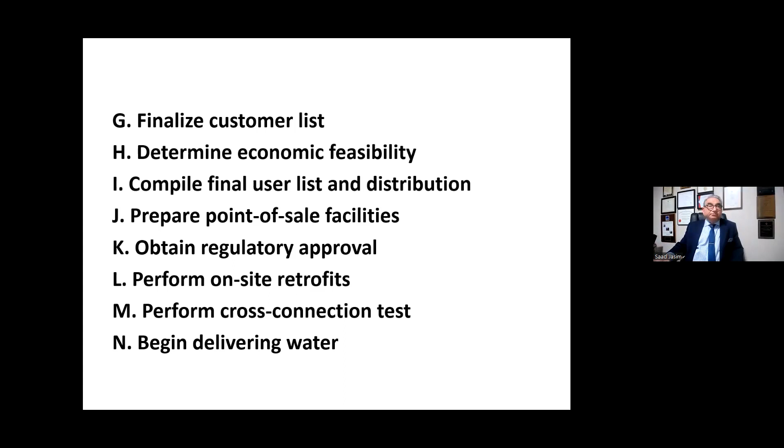And places like Brazil, in fact, they've been active in doing water treatment for their car wash. So basically, they were able to develop storage capacity of 2640 gallons, which is 10 cubic meters. And also they developed a certain guideline for that: hand-operated car wash, oil water separators, wastewater reservoirs, and FCF flocculation column flotation.

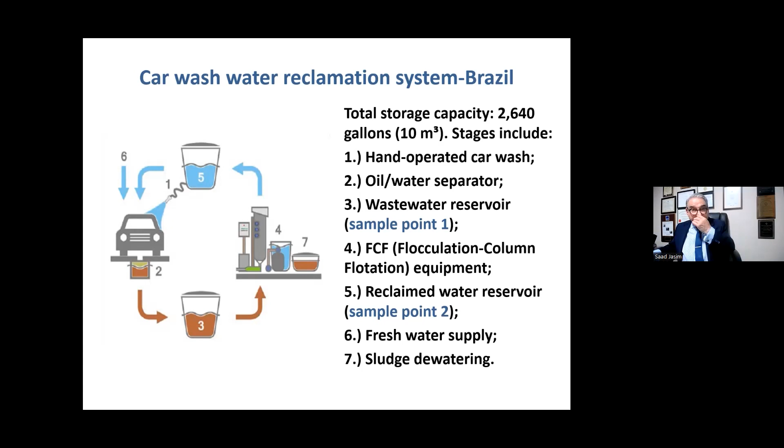And you see here, this has been used for the car wash. And so sometimes you might alter or change one. Like a week ago, something was down. So they looked at the situation and why this thing happened.

In many cases, the reclaimed water distribution system should provide reclaimed water to a diverse customer base. The urban reuse customers typically include golf courses, which are, as I indicated, heavy users. And in some cities, for example in the US, they provide water for cooling, wash down, toilet flushing, and irrigation.

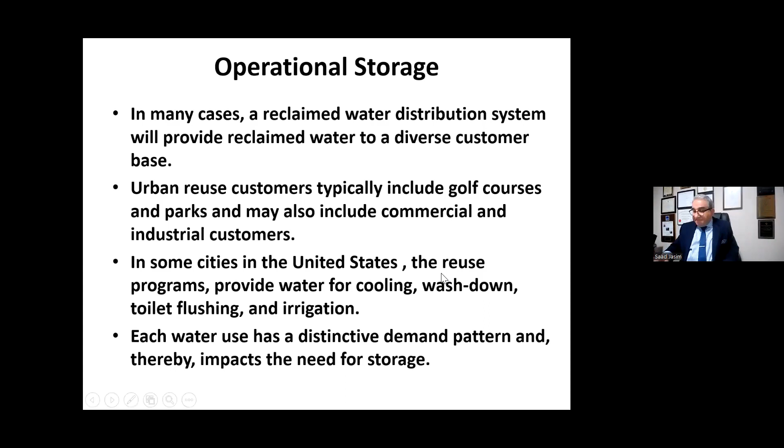Doctor, we need some time for discussion, please. Okay. Yeah, almost done. Basically, that's the last slide. Okay, thank you. If there is any question, yeah.

Okay, first of all, thank you very much for this huge information. This overview is important because it shows how difficult it is to make things clear before starting a project. And since you have sent us your presentation as PDF, everyone can see it again and can also go back to you. But let's see the chat here.

There is just one first question at 20:10. It's about the membrane. I think it's Mohammed Humad. He thanks you very much, and he wants to know about the application of nanotubes to enhance water purification. So the question here is about the permeability of these membranes, about desalination.

What we're talking about is treated sewage, the wastewater from applications, not desalinated water. With the pilot plant we designed, we included a membrane as well. But our focus is not the salt issue here. It is basically the contaminants, could be pharmaceuticals, could be other things, and also the sewage. It's human waste.